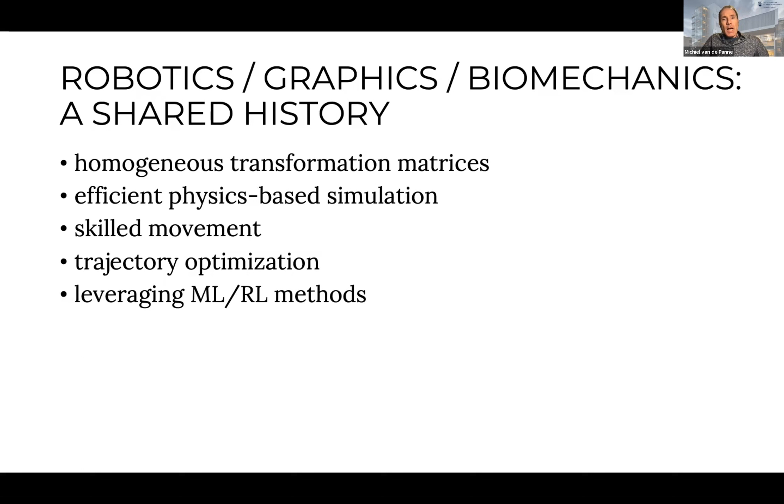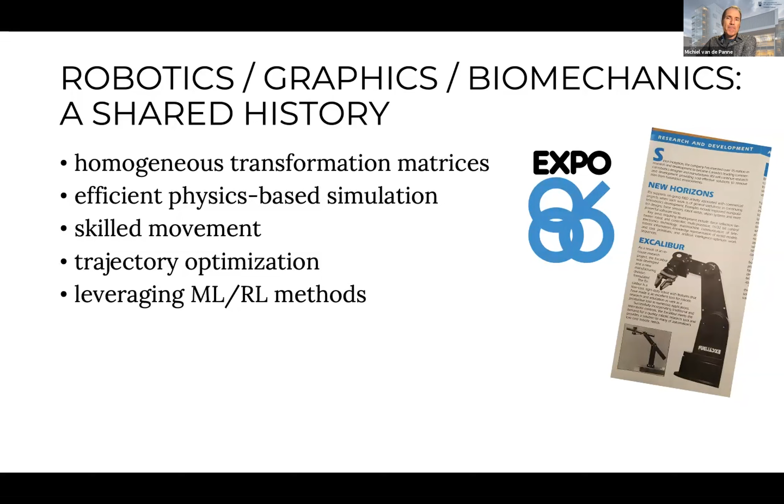Just by way of introduction, my first experience with robotics - and this will date me - actually comes back to 1986, where I worked with a small company in BC that at the World Expo in 1986 in Vancouver had an exhibit of two of these Excalibur robots that would fold paper airplanes and throw them into the audience. I remember many a late night trying to adjust the control paths for these robots and the calibration, because the main challenge was that as they would fold and throw autonomously these paper airplanes into the audience, the robots would slowly drift out of calibration, since they simply lacked appropriate sensing capabilities. So from that point on, I've always been interested in robotics.

Let me give you a sketch of what I'll walk you through, which is the hype curve for: is reinforcement learning a game changer for robotics, and if so, in what way, and how will this play out?

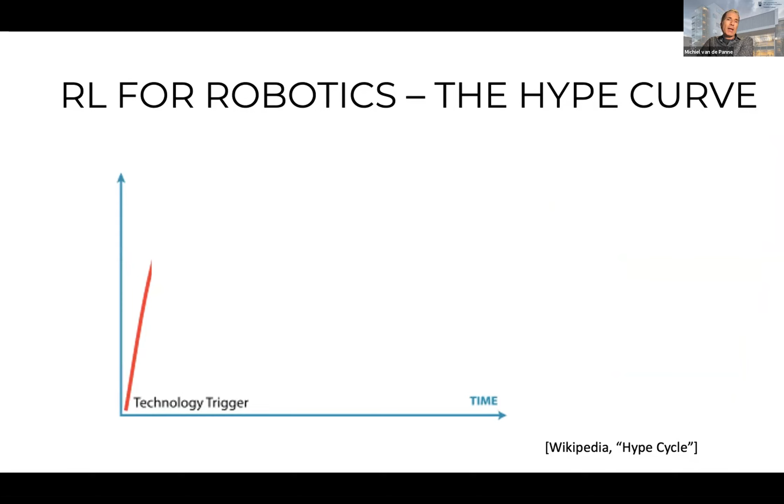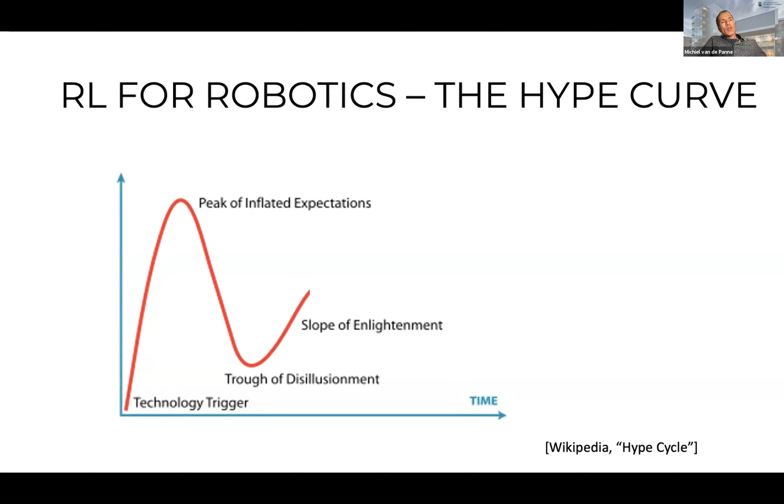So the classic hype cycle curve from Wikipedia is: you have some technology, and then a lot of inflated expectations that can come with it. Then reality sinks in, and people realize they've overestimated the advantages of a certain tool, and we reach some trough of disillusionment. Then at some point, with additional understanding of how a tool can be used, we reach the slope of enlightenment, and finally a more sound assessment of exactly how and when a tool can be used.

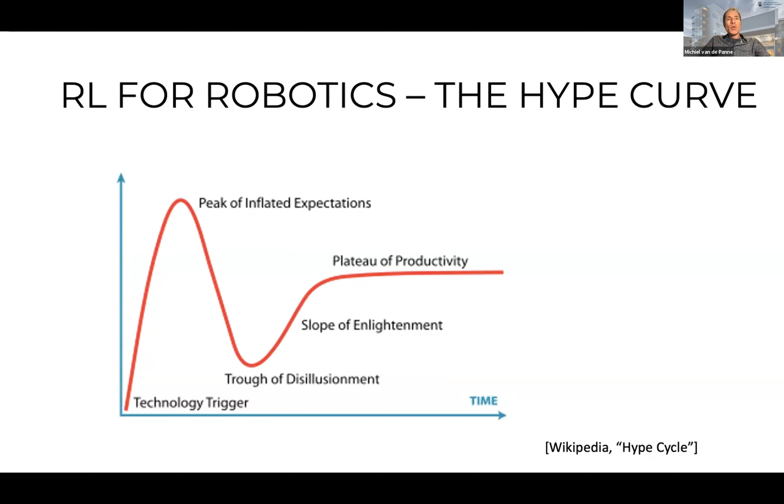So this applies to reinforcement learning as much as anything else. Let me briefly walk you through the parts of this curve.

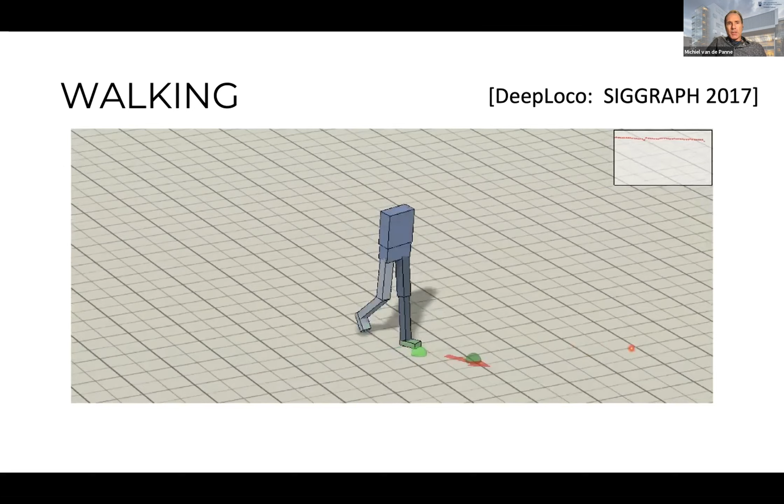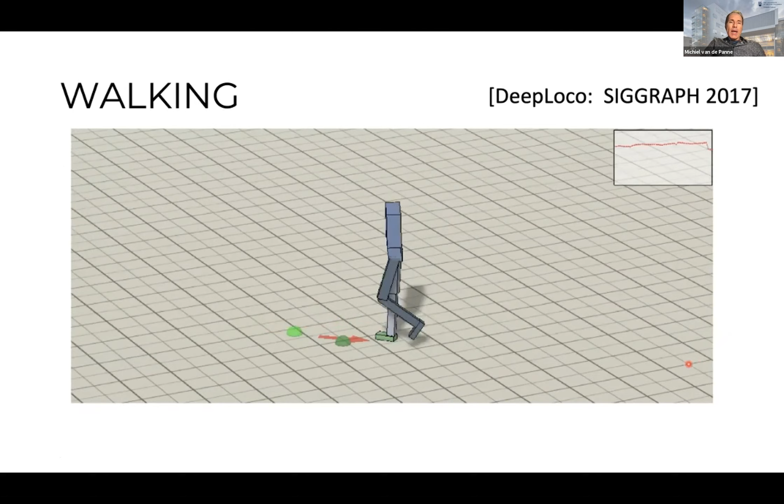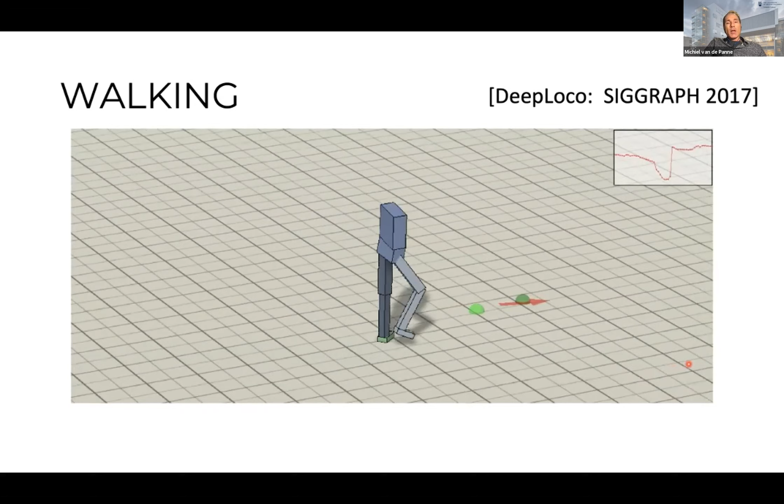But I think one of the positives is seeing interesting emergent behavior. Here's a walking 3D simulated character simply trying to imitate a very simple basic walk cycle, while also trying to solve a task—and the task is very simple, just trying to hit that first green dot you see. Those two green dots represent the two upcoming steps. So it's being trained to both imitate a basic single reference motion clip, as well as turn or take larger or smaller steps to hit that first green dot.

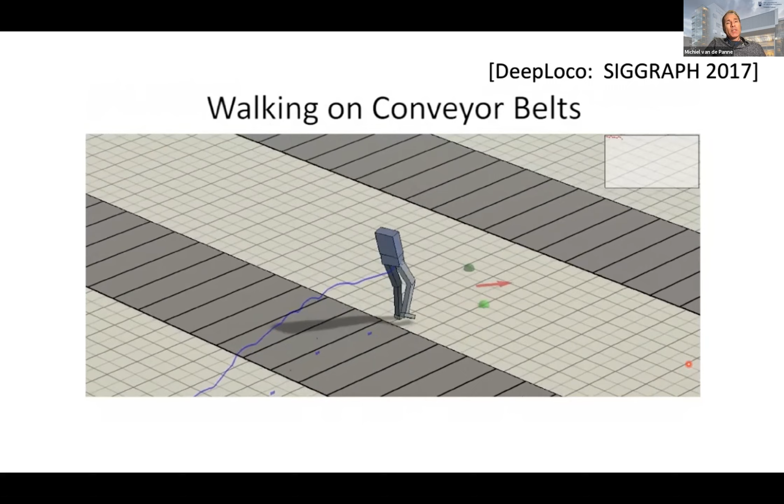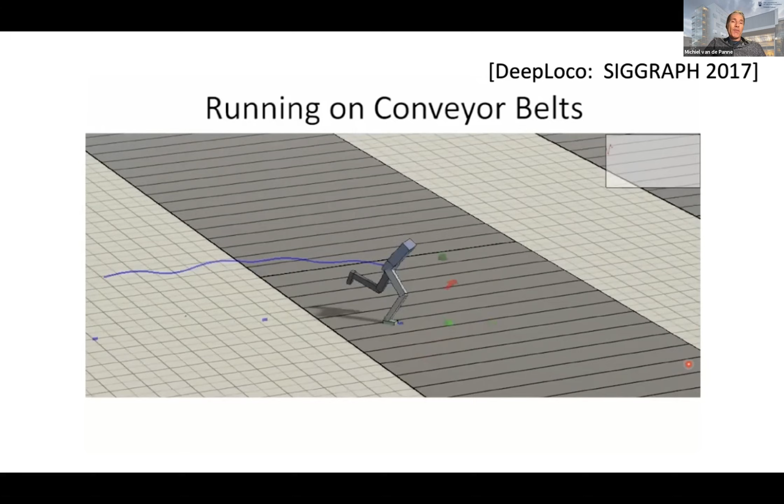This already exhibits a fair degree of robustness simply from the training procedure. This is often not quite appreciated: during training, reinforcement learning is doing exploration, in this case by adding noise to the action space. This exploration consists of a type of self-perturbation basically. Because it's seeing all these self-perturbations during training, it tends to produce a fairly robust policy that knows how to recover from these perturbations.

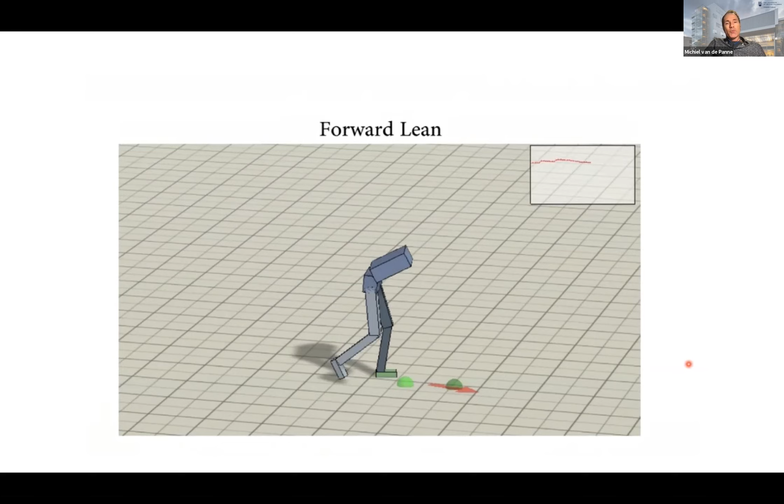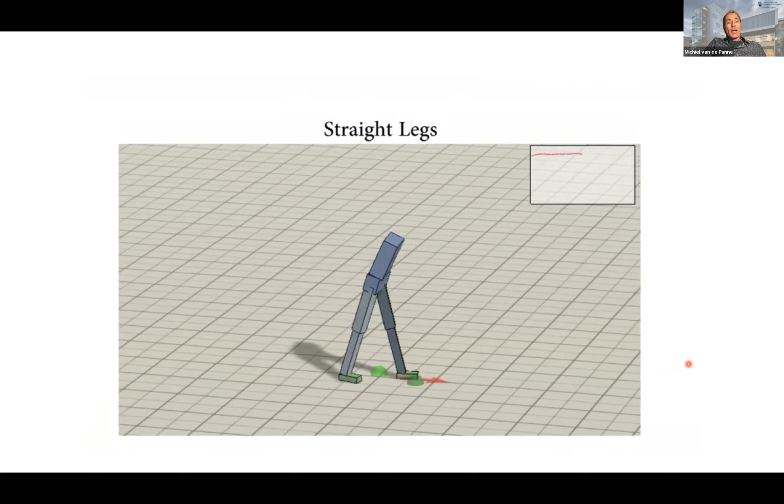What's interesting is you get these robust emergent behaviors, which we can make perform various tasks as we see here. It's fairly easy to stylize, so we can change the constraints or the reference motion—here we're locking both knees, and it's still learning how to walk. Doing this quickly with other kinds of methods could be fairly challenging, whereas in the reinforcement learning setting, we're really free to play with objectives that add various style or other constraints to the system.

So we extended this to more complex characters and more complex motions. Here there's a 197 dimensional state, and the policy needs to learn how to map that to a 36 dimensional action. In this case the actions are not directly joint torques—it turns out to be more convenient for imitation-based tasks to use target angles for proportional derivative controllers, or in this case target quaternions for each joint, using a proportional derivative controller.

So if we optimize the humanoid motion just for forward motion, we can get something like this, which looks more like the early types of results that you saw. But now if we imitate motion capture data as seen on the right, we get a control policy as seen on the left. So you could argue, why are we doing this?

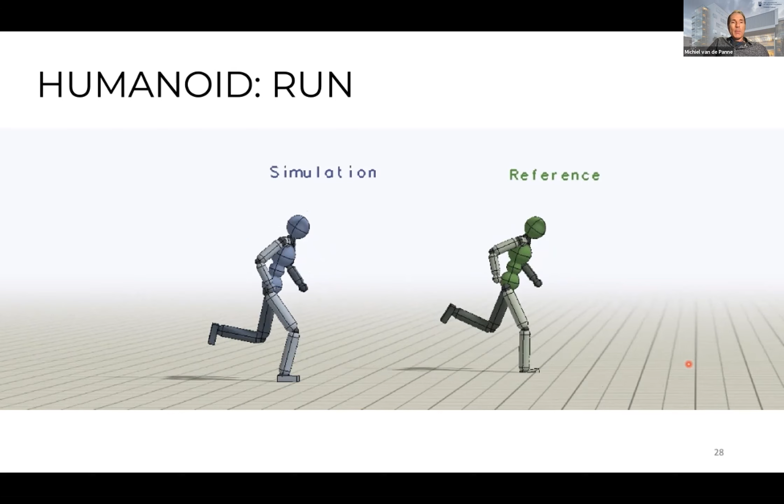Because we're just recreating the motion capture data. Of course, the control policy on the left can actually recover from a variety of situations. That's one reason. But it's also worthwhile pointing out that the motion on the left is actually in some sense better than the motion on the right, because motion capture data, while it is a certain form of ground truth, often needs to be cleaned up—the feet will slip and also penetrate the ground, etc. So motion capture is not necessarily the perfect ground truth that we always like to think it is.

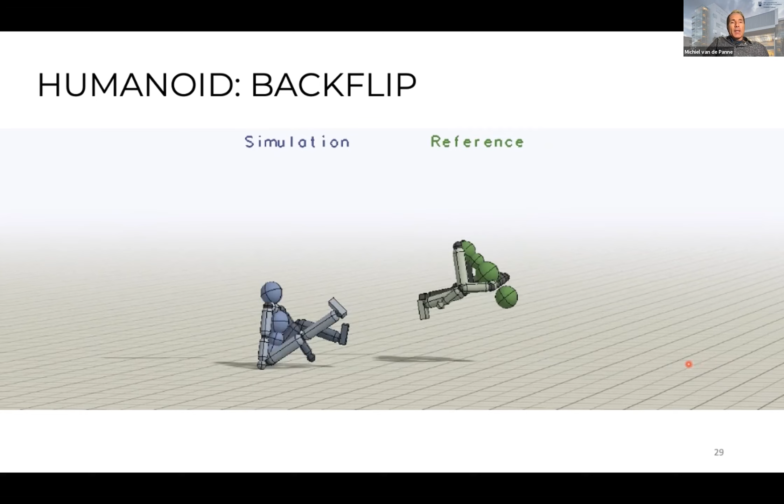These methods do hit local minima, and here's an example. We're trying to imitate a backflip, and this is a problem because it's easy for the character to fall, and then it says, well, I've fallen already, but at least I can still win partial reward points to imitate the backflip while I'm actually lying on the ground.

So it gets stuck in this local minima. By using early termination, we can get out of these local minima. We can penalize falling on the ground, or simply stop providing all rewards and stop the simulation when the character falls. Now it's hit a different local minima, because here it's no longer falling, and it's imitating the start of the backflip and the end of the backflip, hoping you don't notice that the actual flip part is skipped.

So we introduced this notion called reference state initialization, where we begin episodes at various starting points on this backflip cycle. We're not going to run episodes just from the start of the backflip, but also from halfway through and a quarter of the way through, etc. When we do that, we can get good backflipping motions.

By the way, there is also a curriculum used there—you can begin with shorter episodes and then gradually extend these into longer duration episodes. This is maybe not too unlike how if you or I had to learn a backflip: being supported by some external device would let you get a good feel for what each individual segment of the backflip is like, and practice those bits first before finally putting them all together. So this is not an unexpected strategy.

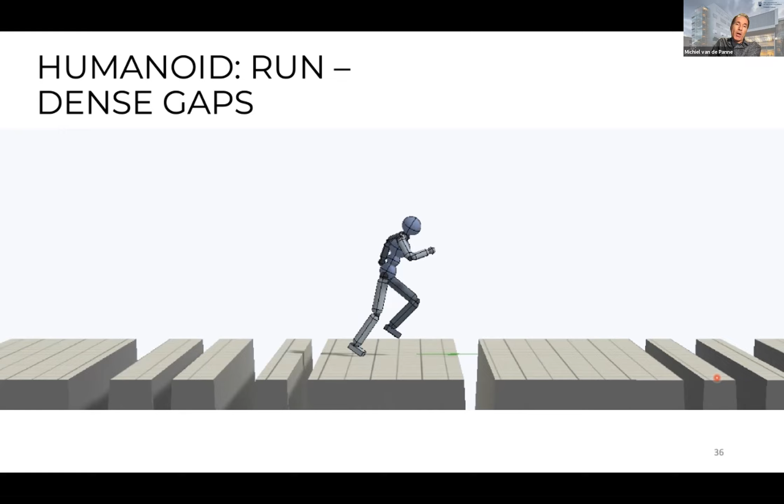We can add different types of sensory perception to this. Here the character's goal is simply not to fall down. It realizes that we can provide the policy with information on the upcoming terrain, so it can learn to condition its actions on that terrain. Reinforcement learning is learning to do these small adaptations to the run cycle via exploratory noise that has been added.

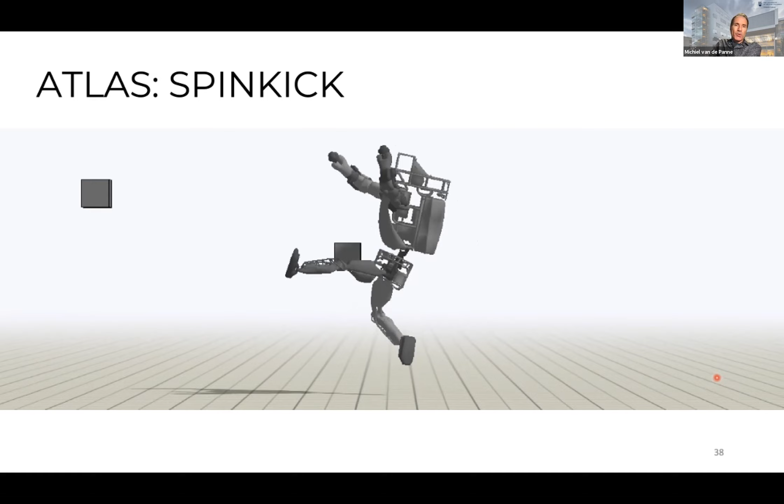Of course, in the context of something that looks a little more like robotics, we can have a different kinematic or dynamic system. This is roughly modeled on the parameters of the Atlas robots, although we're giving ourselves liberty with a few points in terms of the strength of the actuators, and we also added some additional degrees of freedom to the robot here. But the point is, we really can begin to use motion capture data as a rich source of motions to learn from.

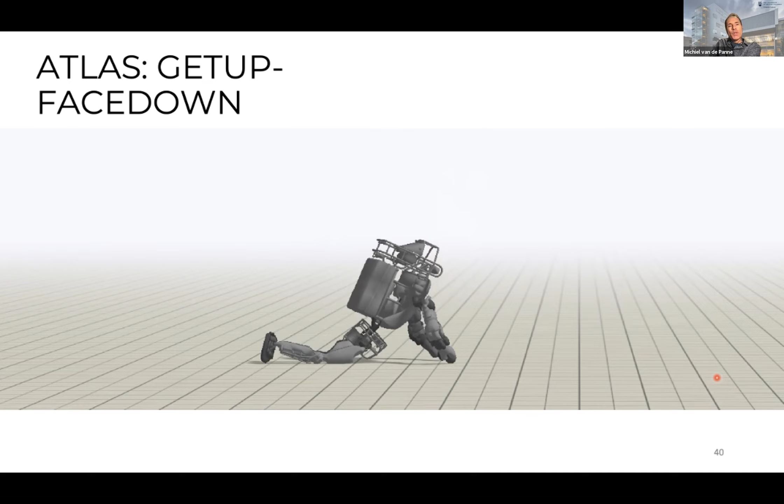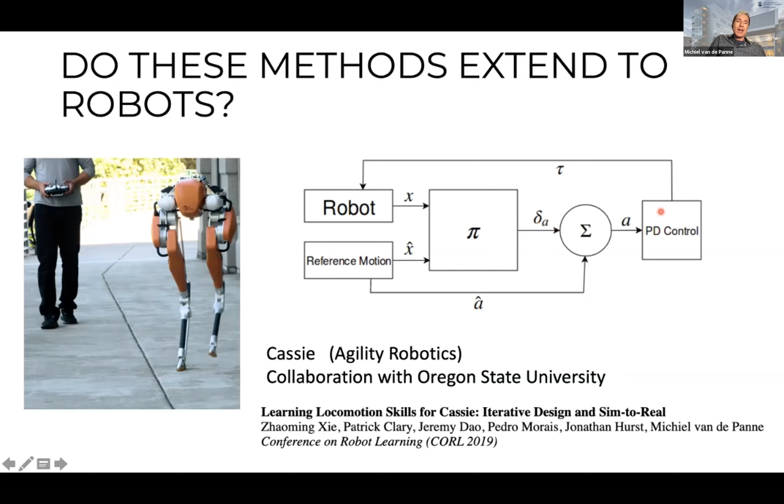But so here's the architecture that we're going to learn. We're going to learn this control policy pi. We're still going to have some type of reference motion, a rough sketch of the motion that we want to get out. Instead of producing target angles, we're going to produce changes with respect to the reference motion. So these will be offsets from the reference motion, and we're going to use that to drive PD controllers for the joints.

So by the way, if you do this—okay, this is the first attempt. We give it a reference motion, and in simulation this all worked fine. So we said, great, it looks like this is working, let's see what happens. And this is literally one of the first tests that we ran. So this is what sim-to-real really looks like.

The robot all set up, and this is Patrick Clary from Oregon State and Agility. And so, as you can see, okay, didn't work. And in fact, worse than that, during these early motions, the body really ended up shaking quite a bit, and so there were problems.

So to get these fixed, there's a number of things you can do. Maybe most notably, one thing we did not do is what's called dynamics randomization. Dynamics randomization basically says, if I don't know the exact parameters of my physical system, what I'll do is train on noisy versions of the physical system - various masses, various coefficients of friction, etc. And then if my control policy is robust to those variations, then hopefully it will be robust to any mismatch between the simulation and reality.

So we're actually not going to do that. But here are the other tricks that we use to help solve this problem. So first we are going to add left-right symmetry. So for any given learning tuple, we also add and learn from the symmetric motion tuple.

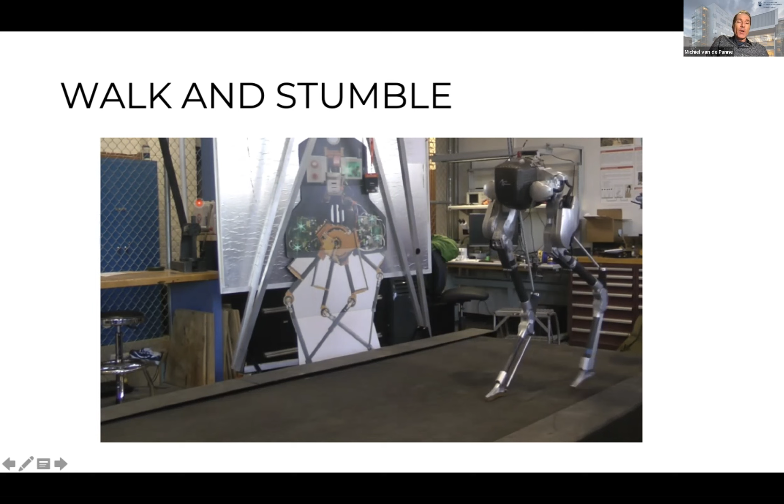In any case, here's a variety of other policies that have been trained. It actually stepped off of the treadmill by accident, but no problem - it recovers from that. There's going to be one other step off of the treadmill here, and this time it's too much. I'm purposely showing you some of the failure cases because at some point when just seeing the motions that work, it gets boring after a while.

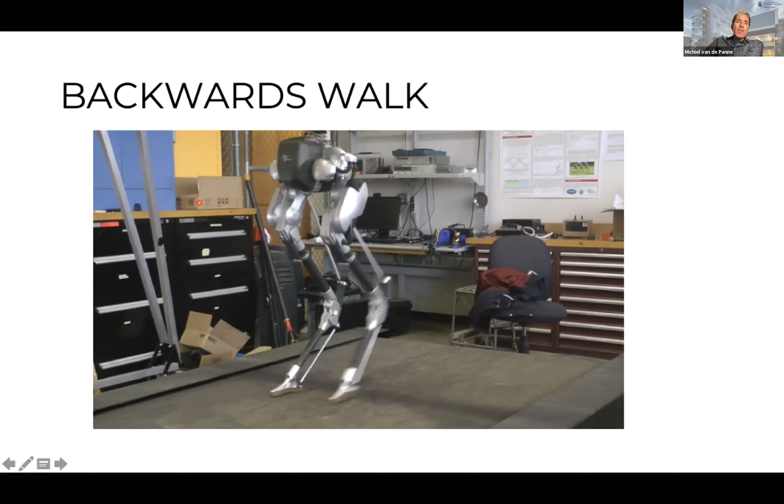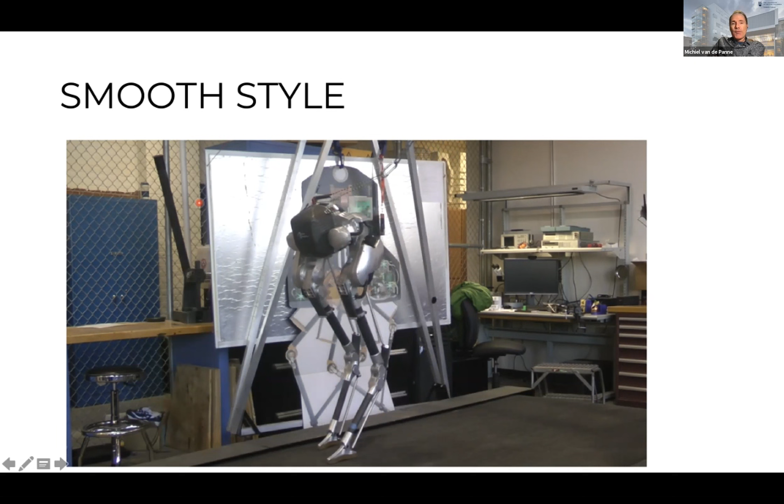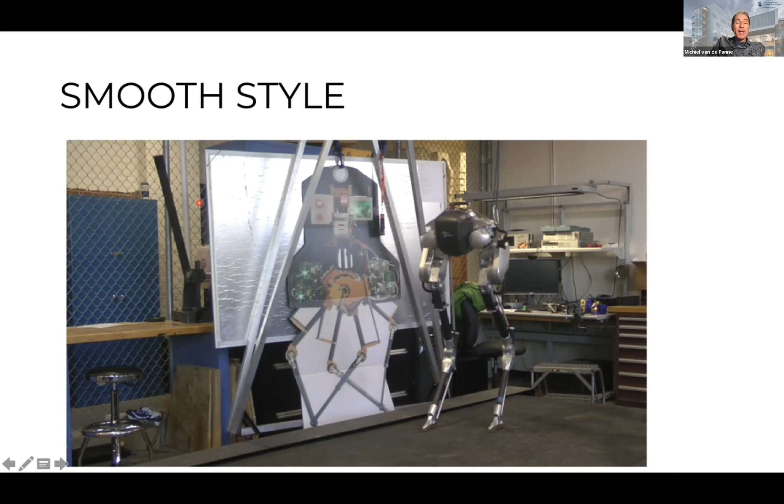But yeah, so we can train this to do forwards, backwards walks, sideways walks. So these are all just fairly small neural network policies. Here we're experimenting with different style objectives. So this style objective is asking it to lift the feet higher.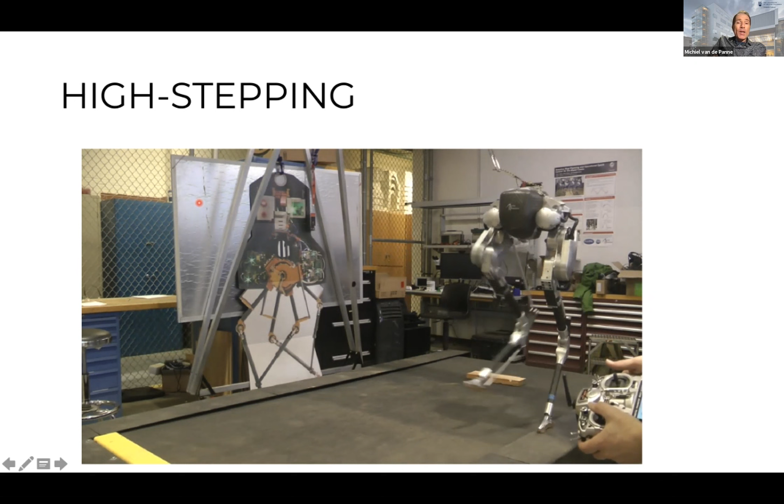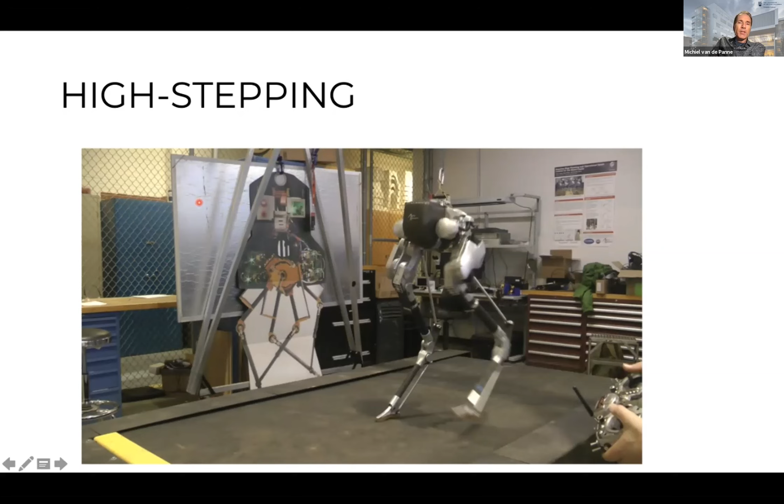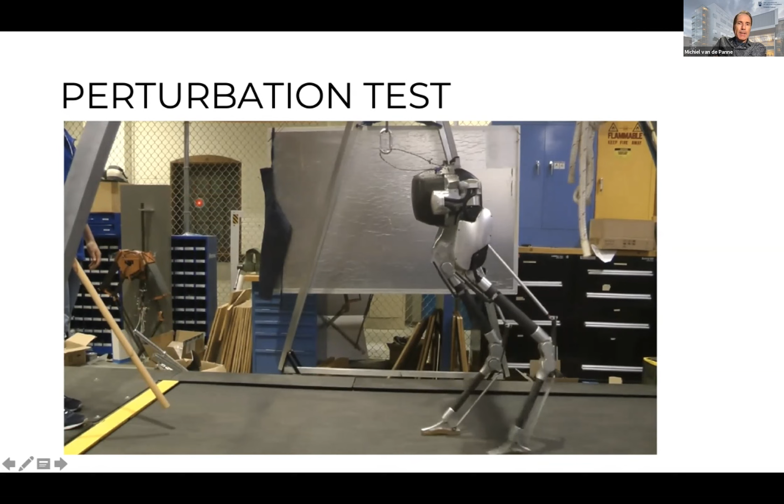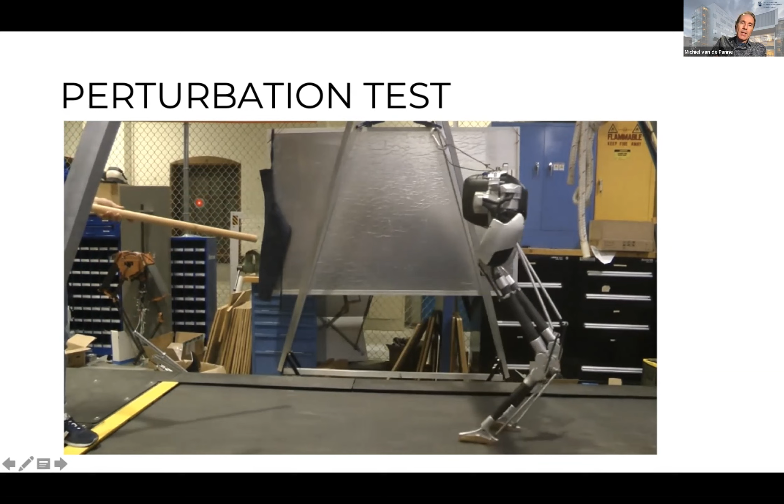The motion is being controlled with the joystick. That joystick is basically specifying the desired goal speed and goal direction, and the policy is conditioned on wanting to go in a certain direction at a certain speed. We were really happy with this test result. This is only trained in simulation, no dynamics randomization, direct transfer to the robot, and it's really walking in a fairly robust way.

So again, lessons learned. It's important to author the right objectives. We had to add regularization terms to remove unwanted accelerations of the body, and there are various types of foot trajectories compatible with successful motion, so you want to provide some indication of what that should look like. Then for sim to real, there's a variety of points important to pay attention to, and in this case, no dynamics randomization is used.

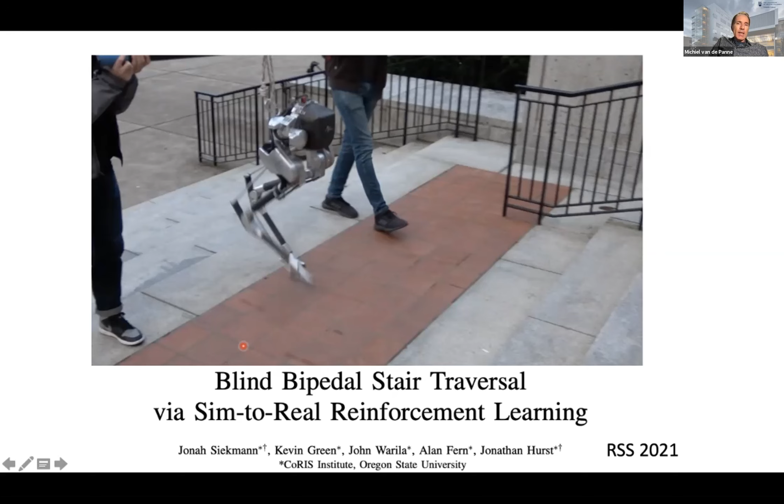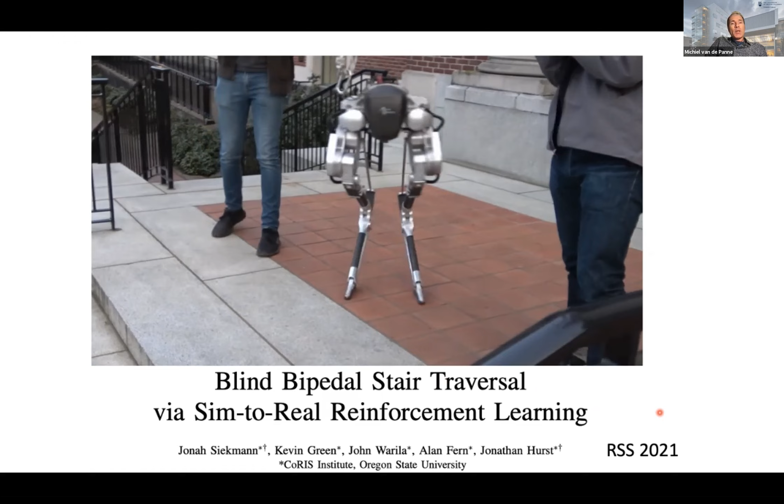I want to briefly show this continued work by Jonathan Hurst and other folks at Oregon State. You may have seen this: a blind biped stair traversal. In simulation, it's seen a variety of steps walking up and down, but it's not given knowledge of those steps. It just knows that they exist and learns about them via proprioception, but it doesn't have a vision system. What's surprising is just how robust you can make these motions, just via proprioceptive feedback and training in simulation, with direct sim to real transfer. This was actually a really surprising result to me.

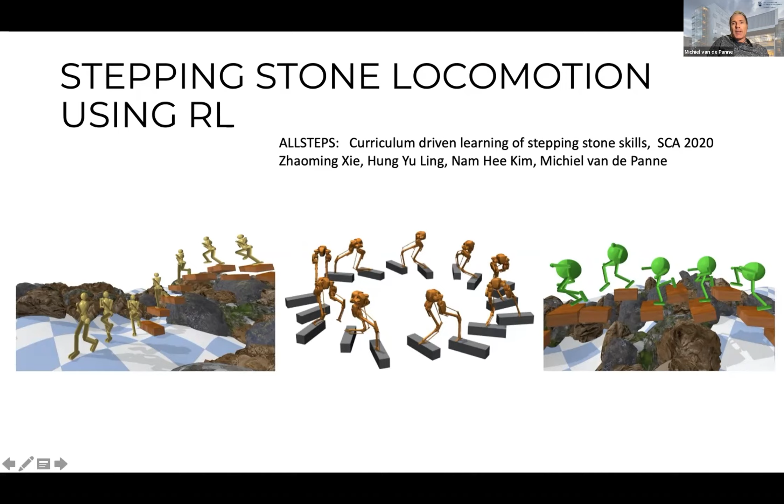The question is, for robots and simulations, what can we do to solve these kinds of stepping stone tasks? So we're going to set up a fairly simple reward function where the goal is to make forward progress and make contact. We're going to give it a target sequence of steps, so it has to step here, then step here. We're going to give it an ordered sequence of steps, generally encourage it to be upright, and a few other terms.

So here we are going to use torque-based control, and importantly, the policy only gets to look two steps ahead. So it's standing on the first step, standing on step 0, and it can see step 1 and step 2. That's what it'll be conditioned on.

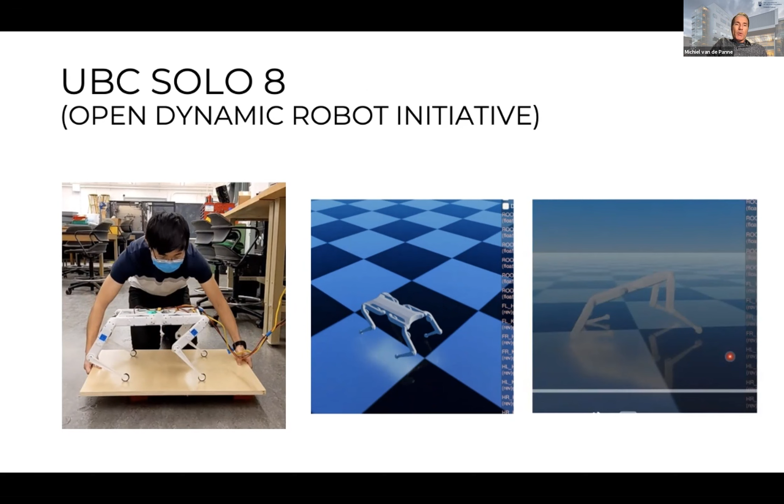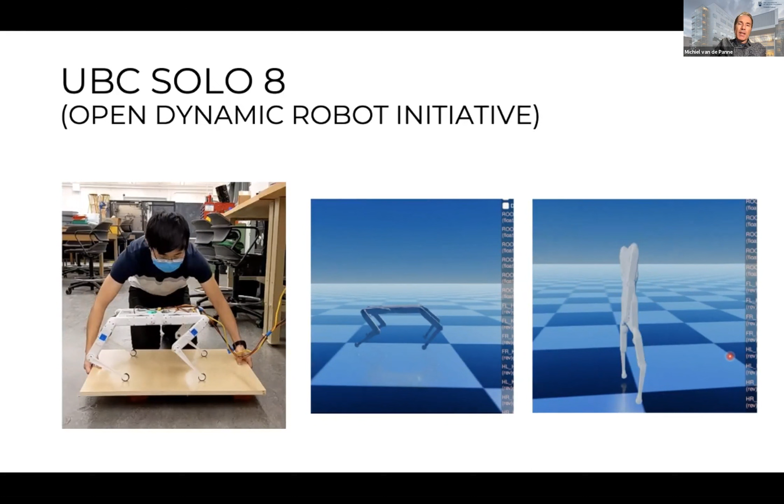We're also actually building a solo 8 robot. This is the one we've built on the left, balancing using the IMU. Where we want to go with this is shown on the right — we want to generate a variety of interesting motions with this particular robot, because it is very athletic. In fact, we've discovered that it can do a bipedal walk. The nice thing is the joints can spin all the way around, so we actually want to experiment with both bipedal and quadrupedal walks for this.

So big picture, what's next? I think there is convergence happening between robotics, animation, and biomechanics. Arguably this convergence was always there, because we're all interested in the same problem of controlling movement and skills. I think we are fairly close to being able to see highly capable digital humans and animals that will populate various worlds — the NVIDIA Omniverse, the Facebook Metaverse, etc.

These, and the next versions of Unreal and Unity, are already all equipped with physics-based simulators, so the next step really is to equip all these worlds with digital humans — including car simulators, for simulating autonomous vehicles, etc. We're getting close to being ready for that.

I think we'll see a lot more between robot and control co-design. At some point you really want to design the body and mechanics together with the control you know it's capable of, and now that we can come up with much more arbitrary control strategies, I'm optimistic we could see a lot more diverse robot construction in terms of actuation and sensing.

Longer term, both model predictive control and model-free reinforcement learning are really trying to solve the same optimization problem, with different degrees of cost or compute amortization done in different ways. In model predictive control we're doing a lot of search and planning using the model, whereas here all the search and planning effort has been amortized into the policy. They're really trying to solve the same problem, so I'm really interested in deeper connections between these two, because as we know from methods such as AlphaGo, you actually do best when you do both at the same time.